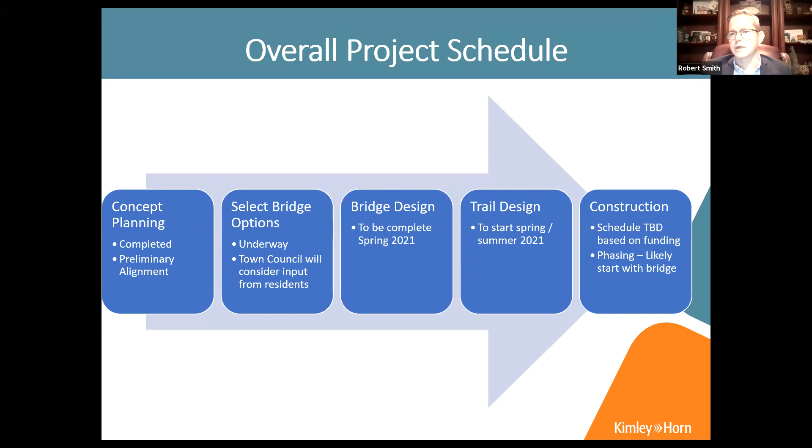These are some of the things we took into consideration when the stakeholders got together, which included most staff members and some members of boards and committees, when we first took a look at this and started looking at the multimodal paths. Today is pretty much the first step in getting some direction from you, the residents, to take over to town council. At the end of this, Mike Woodward will go over a survey that we're going to be putting out there as well.

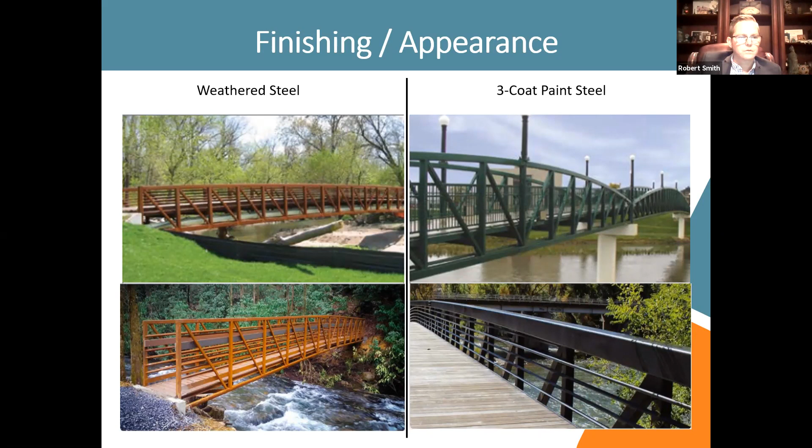So it looks like, out of the 15 guests that we have on here, most people are for the painted coat. But again, the survey is going to be online, so please make sure that you fill that out. We're just trying to gauge a feel of what the residents are moving towards.

And then as far as the mesh versus the vertical picket, who here is in favor - we'll go with the vertical picket because I've got a feeling that's going to be a little bit more popular. I don't know how to raise my hand, but I'm for the vertical picket. Okay, perfect, thank you, Brandy. Yeah, sorry.

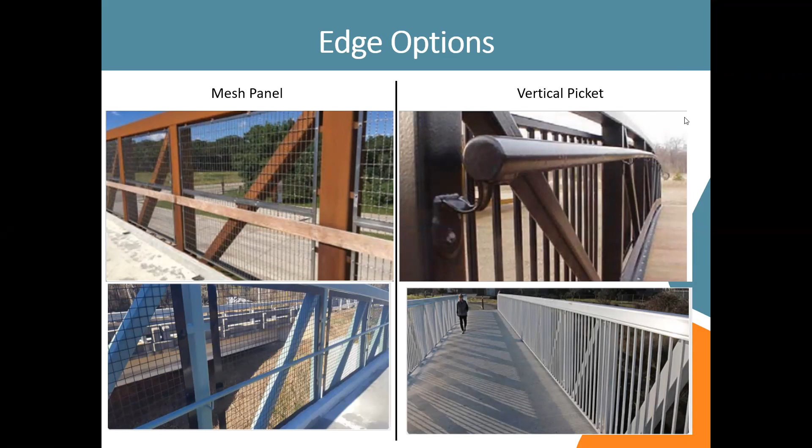I saw a thumbs up there too. Yeah, I think that one's going to be overwhelmingly popular, just from the look and feel wise. I think that's going to be the more popular choice.

Will there be additional lighting on the trail? Yes, there will be, but it will be somewhat ambient lighting. It's not going to create light pollution to where you can see it from the homes. We can either do it from the ground or half raised, but it's going to be something you'd see on the West Orange Trail, kind of in the suburban sections.

Robert, I have a related question about finish. The water pipe that goes over the canals, that bright blue - do you know if we'll have the option to paint that at all? Because that's really going to detract from whatever, unless we paint the bridge blue. It's pretty bright.

Yeah, I have no experience in that. I know that sometimes they're required to have it as a blue line to indicate what type of line it is, so I'd have to defer to Mike or Joseph on that one. Well, maybe it's just something to look at. Obviously we don't need that answer tonight, but for the view of the bridge, that thing would really detract from it, I think. But I agree, I don't know myself, but I got a guy.

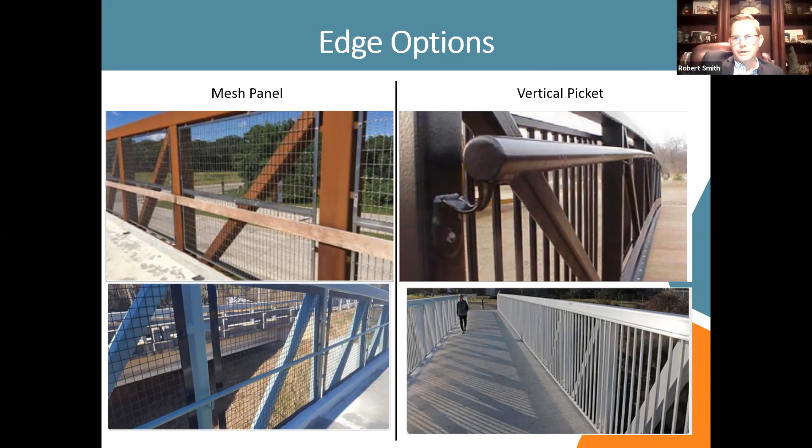I can ask someone. Good. We'll get right back to you. Let's show the options 1 through 4 again real quick. Options 1 and 4 are somewhat similar, and 2 and 3 are somewhat similar.

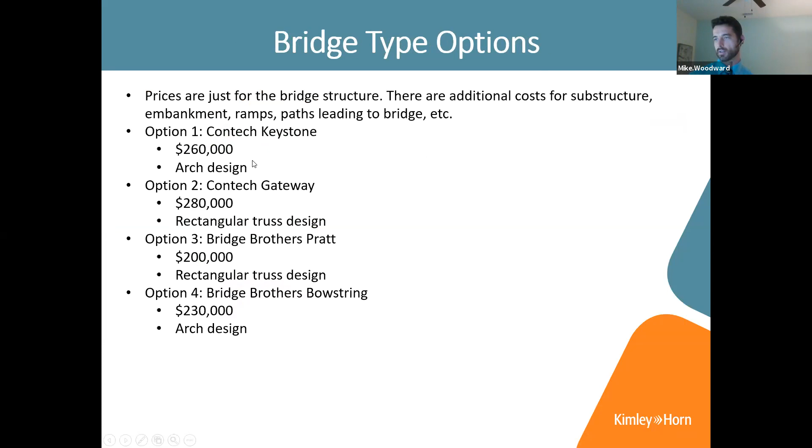Yeah, so all the costs are shown here real quick. I'll hold this for another 3 seconds. Option 1, 2, 3, and 4.

Do you want to start with option 1 and ask for raised hands there? Or you can go in the chat box and just indicate which one you guys are in favor of. That's probably best.

Can everybody look through the images one more time, please? Here's 1, 2, 3, and 4.

4 is similar to 1. It just has a different company and it has the weathered look.

Can I ask a question on number 1? Yes, sir. Do you see that lower portion? Is that how it would have to be if we chose 1? You see that span that goes from one side to the other? Could it be raised to be in line with the pathway itself?

Joe, I think it's kind of asking: this portion with the arch and the piece that extends under, could this be raised in proximity to the path itself? So the answer is yes, but it depends.

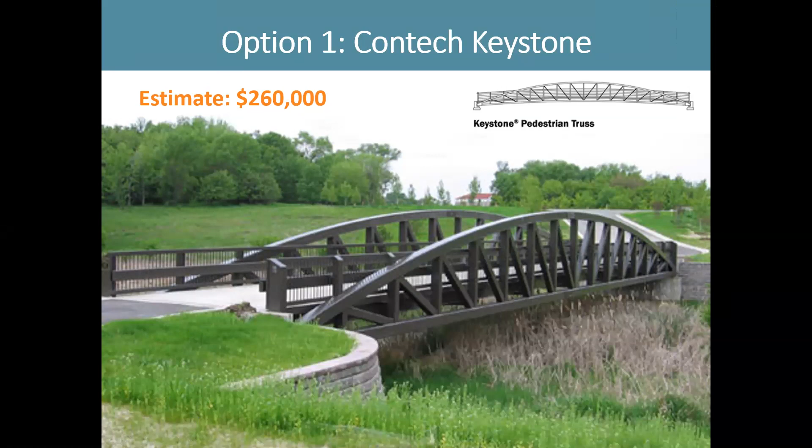And that might be a good reason for a slight arch that some of these are showing, for boat clearance without making it too drastic of an approach. Yeah, if you get option 2...

Well, that's where option 4 helps. If you go to option 4, Mike. Yeah, that's where, if you notice, the horizontal component to support the arch is equal to the path. It's on the same level as the path.

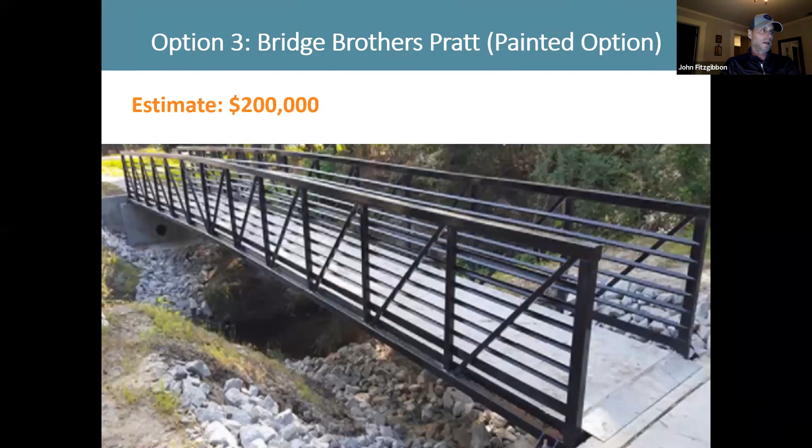Yeah, it's on the same level, so it kind of negates what T. Kelly was saying and allows us to design the clearance appropriately with the abutments. So the abutments are going to drive the height to maintain us staying consistent with the bridge that's across the way, so that we're not restricting the clearance.

Ultimately, the bridge over Main Street becomes your critical path, right, for boats. That's correct. And then we can design that bridge on option 4, and the approaches to it, to maintain the center line elevation to match what's happening on the bridges at the main road. Let's keep in mind the landing point on the north end is relatively high, so achieving that minimum clearance that matches the vehicle bridge is not going to be a concern. It'll happen, and I don't think that should factor too strongly in your decision about which bridge.

Because that's really just about the abutments, and we've got a lot of flexibility to bring it into the bridge. The height is going to be determined by that. We can make the vertical clearance work with any of these options. So just let us know which ones you prefer. It's really about the look. Thank you.

So based on the comments, it looks like 1 and 4 are the favorites, with 3 coming in. 1 and 4 again are similar, and then 3 is more of the forested look that you would see in a state park or something like that. But I think a lot of people are trying to echo the history behind the railroad. Yeah, and I should have said this earlier, but 2 and 3 are similar, but 2 has kind of the top piece and 3 is open.

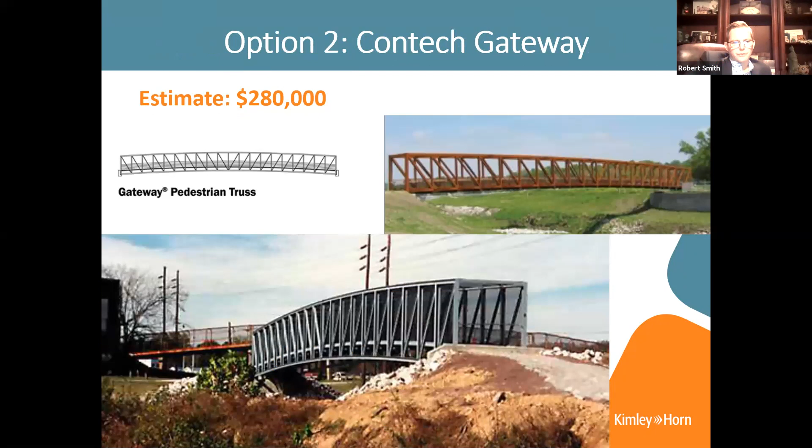Frank, again, the problem with increasing the width of the bridge is if we increase the height, then we have to increase the length. And I think that we are a couple inches short of making it a FDOT bridge, so we want to make sure that we maintain that as well.

For last, does the bridge have a name yet? No, the trail does. It's the Ward Trail. And the reason for that is because we purchased the majority of the properties from the Wards, and it's to honor their family name. I think Ken and his wife did a lot for the town, and it's just a way to honor them and their heritage.

All right, is there any other questions? We did think about the bridge over the River Kwai, but that was kind of voted against. That has a little too much history. Yeah, it's kind of problematic.

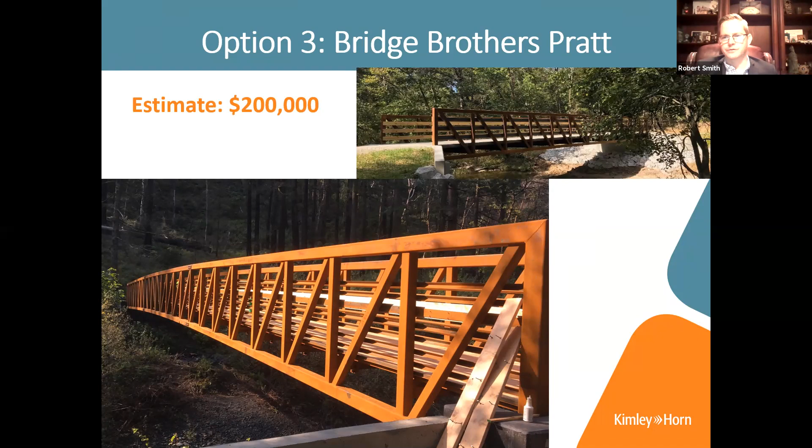I keep stumbling with this thing. I was trying to, well, I'm allowing to share now. It's just hard if you allow for a share, that means... I have just a quick two questions, sorry, we kind of came in a little bit late, we kind of forgot.

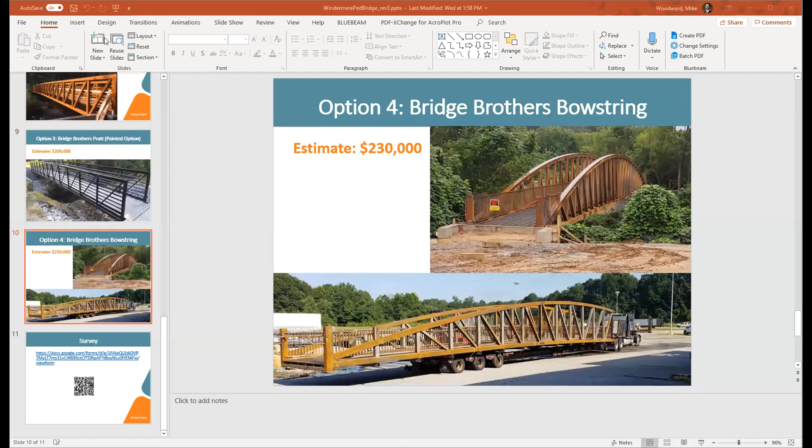The one question is, what is the current width of the existing bridge? Sorry, I didn't think that would be a hard one. It's not wide enough for two golf carts at once, I'll tell you that much. We didn't spend a lot of time measuring that, knowing that since it's not wide enough, it would have to be replaced, so I haven't put a lot of effort into understanding that bridge. I would guess I don't know. Like when we did that bridge years ago, it was 5 feet wide, but you still have the impedance of the handrails, so it's probably like clearance, maybe 4 feet.